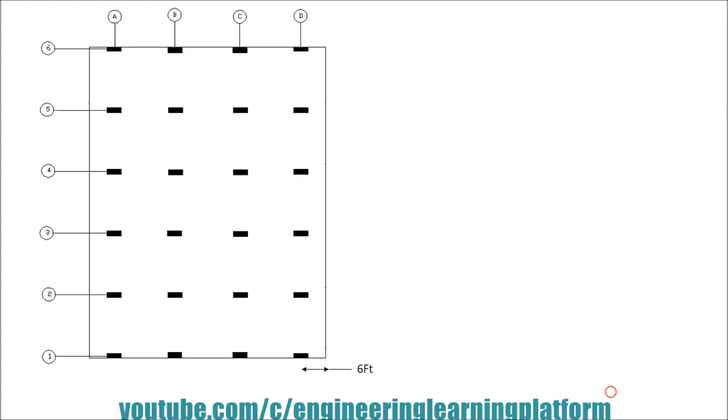In this video, I am going to show you the complete design and detailing of a reinforced concrete flat plate slab using ETABS. And in the video, we will also use Excel for the shear check of the slab.

The given parameters are: FC prime 5 KSI, fy 60, floor height is 10 feet, and we have to design the first floor slab in a 3-story building. Columns are 12 by 36, center to center span is 12 feet. The occupancy of the building is residential. SDL load is 36 PSF, plinth beam is 12 by 24. We have to use UBC 97 and ACI code.

First, open ETABS and go to new model. Define the grids in X and Y direction. Number of stories is 3 and the story height is 10 feet.

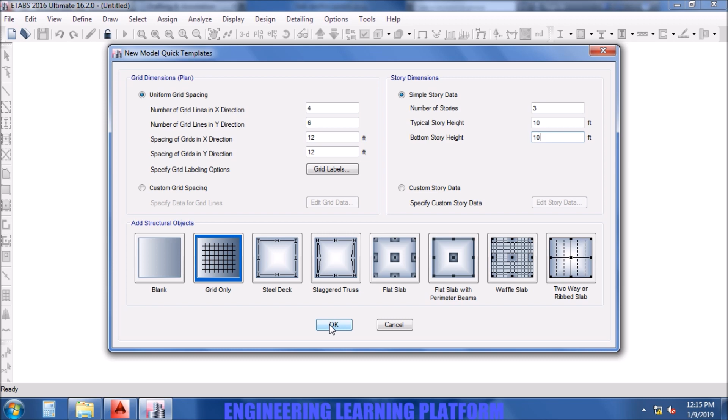Defining material properties of concrete as 5 KSI or 5000 PSI. You need to check the material property data.

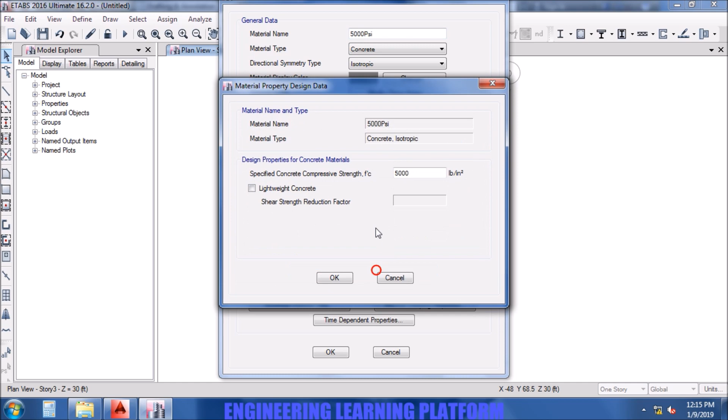Defining the reinforced bar, 60 KSI. Let's rename it as G60 deformed so that we can identify our material easily.

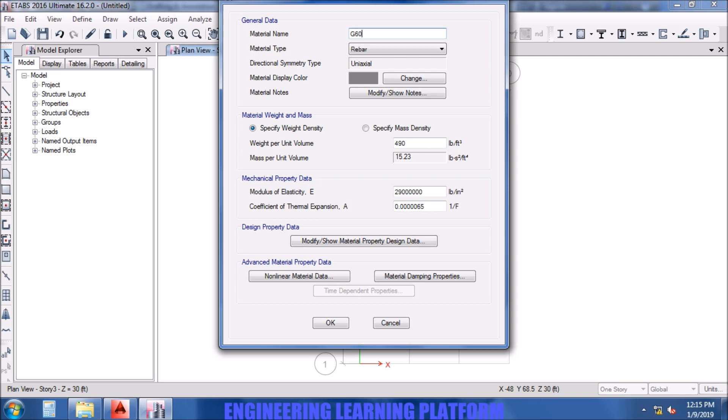Now we will need to define the frame sections. First, defining the column section. The column is 12 by 36 as given.

Material was 5 KSI. The property modifiers, according to ACI code incorporating cracked moment of inertia, is 0.7 of the gross moment of inertia. So we incorporate that using property modifiers.

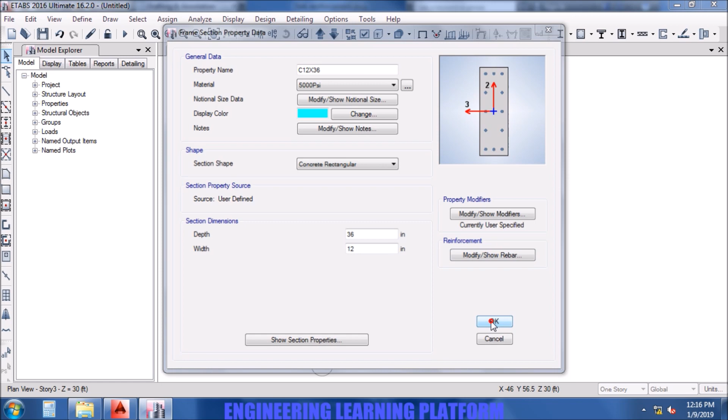Modify show rebar, in which we will select our rebar material. Click on OK. You may delete multiple properties which will not be useful to you, but for now I am leaving them.

Now defining the slab. In order to find the slab thickness, we will use the ACI table. The slab is without drop panels and consists of exterior and interior panels, but conservatively we will use exterior panels so that our slab has a uniform thickness.

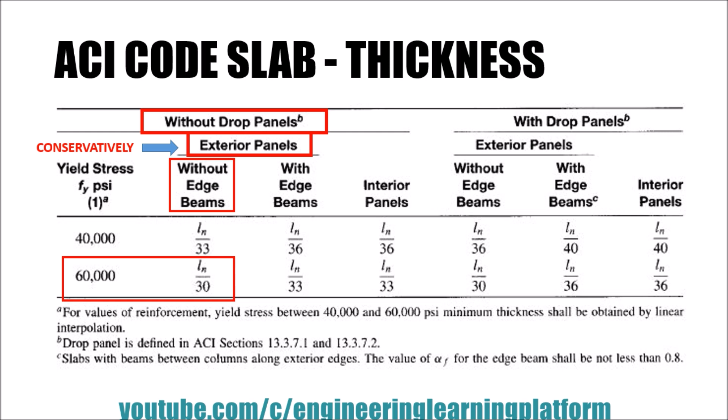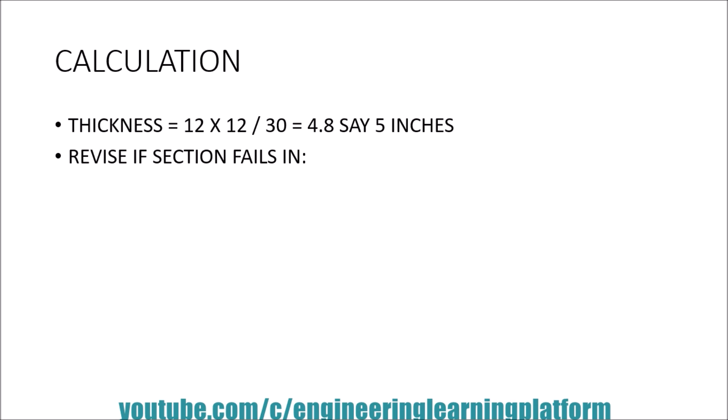An exterior panel will give a higher value of thickness, and it is without edge beams, with steel of 60 KSI. So we divide the clear span by 30 to get our initial iteration of thickness. You may revise the cross section if the slab fails in deflection, flexure, or punching shear, which I will check later in the video.

For now I am defining the slab as 5 inches, which we calculated. Property modifiers.

In order to understand the difference between shell thin and membrane, you have to go to the previous videos for the ETABS tutorial, whose link is given in the description of the video. For now, I am assuming we have gone through the previous videos.

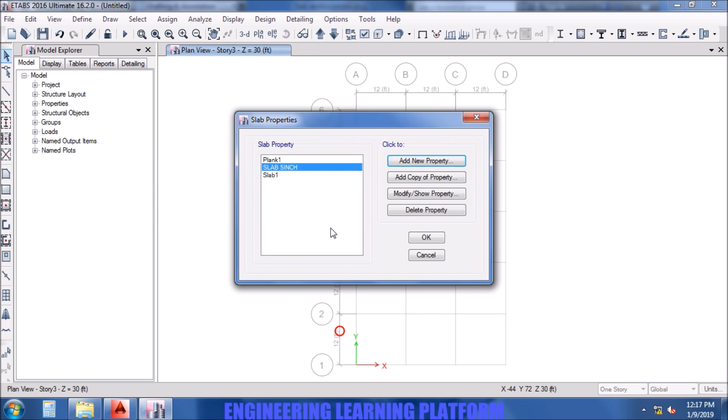So now we will incorporate the crack moment of inertia for the slab using ACI code, which is 0.25. Click OK. You may delete the other properties which are not useful to you, so that there are less chances of mistake.

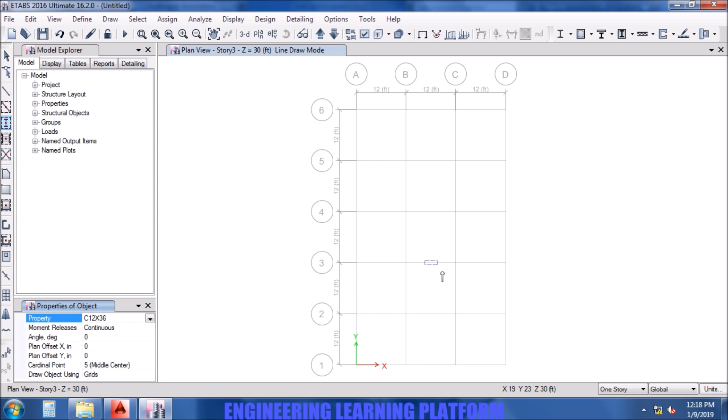Now start modeling the structure. Since the grid lines lie at the centroid of the column, you can always draw the columns the way I drew them.

Now you see we have to select the slab which we defined. Now for the cantilever part of the slab, which is 6 feet given in the question, we will draw a dummy beam with 0 stiffness, which is just for drawing the slab boundaries.

6 feet multiplied by 12 gives you 72 inches. So give the offset dimension of the dummy line. Similarly for the other side.

Now we will draw the slab using the line. Now you may delete the reference lines which you marked.

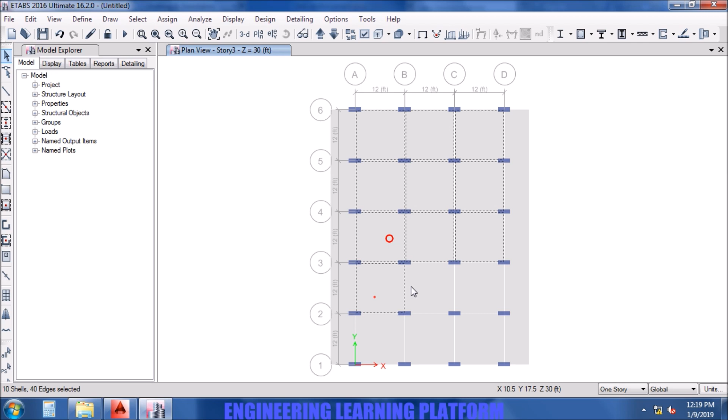Now for slab meshing, in order to know how the slab is meshed, you need to go to the previous videos. For now, I am assuming you have gone through them. According to the slab meshing rules, the slab shall be meshed in a maximum 3 feet by 3 feet area. Since the slab panel is 12 feet by 12 feet, dividing it by 3 feet gives you 4 by 4 areas in the x and y direction.

Since the slab meshing lines shall be continuous, you need to select the joints, and for the cantilever part, mesh it by extending the lines from the joint. So the cantilever part is meshed in the y direction. For the x direction, it is 6 feet, so at least 2 areas of 3 feet by 3 feet are required.

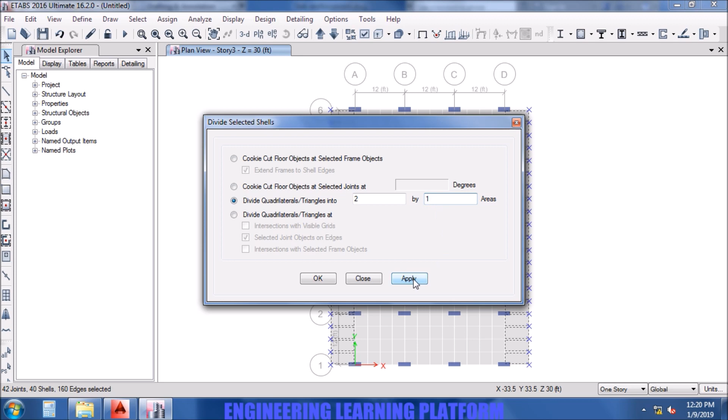No meshing required in the y direction since it was already meshed. So now we have done the meshing of the slab manually. For auto meshing options, you may click on the video whose link is given in the description.

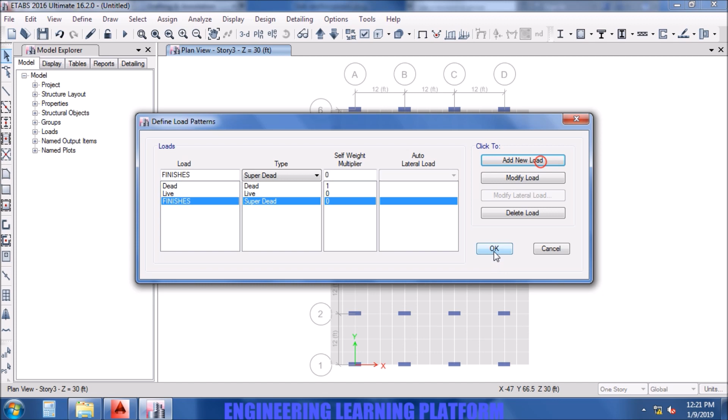Now defining the load patterns. The load patterns for the finishes, which is a super dead load, now we need to assign the loads on the slabs.

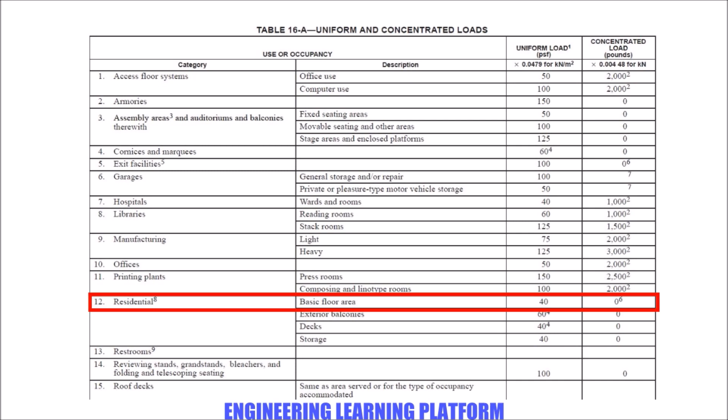First of all, select all the slab panels using the selection option. Go to shell loads and click on live. Now going to UBC 97, which we were advised to use, the live load for residential structure given is 40 PSF. You may click on replace existing loads, so any existing loads will be deleted.

Now click on previous selection and assign the 36 PSF finishes load. So now we are done with assigning the loads to the panels. You have to verify the loads by clicking on a panel and right click.

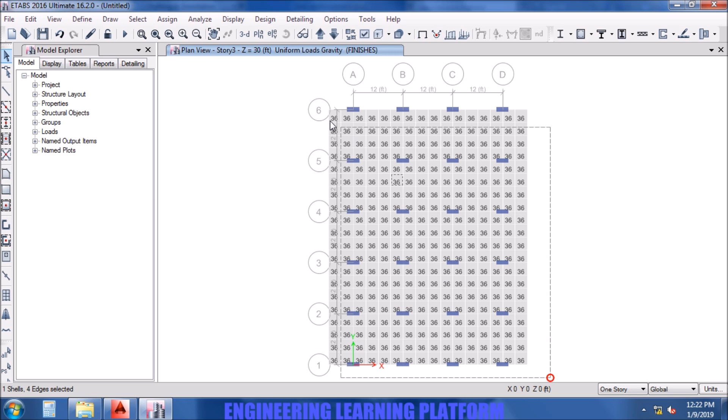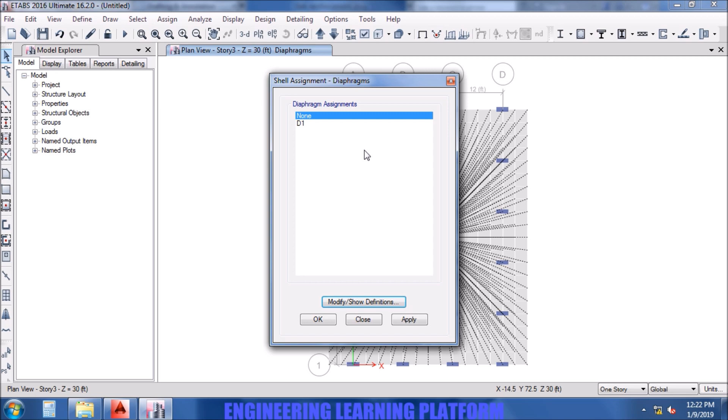Since the loads are now assigned to all of the panels, we may proceed to the next step. We have to assign diaphragm to the slab. The diaphragm is usually assigned in a non-prismatic or irregular structure, but our structure was regular, so it was not necessary to assign the diaphragm. Make sure that for concrete structures the diaphragm selected has a rigid property.

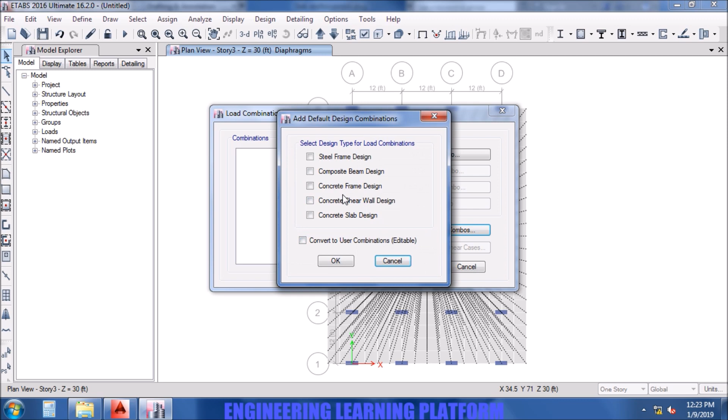Now selecting the design code for the slab so that our combinations will be according to ACI 318-08. Now add default design combinations. Click on concrete slab. Since we are designing the slab, check the combinations according to ACI code.

You have to add a long-term deflection combination so that we may check that the slab is not failing in deflection. Now the multiplier for the sustained loads is 3, and for live loads is 1.5.

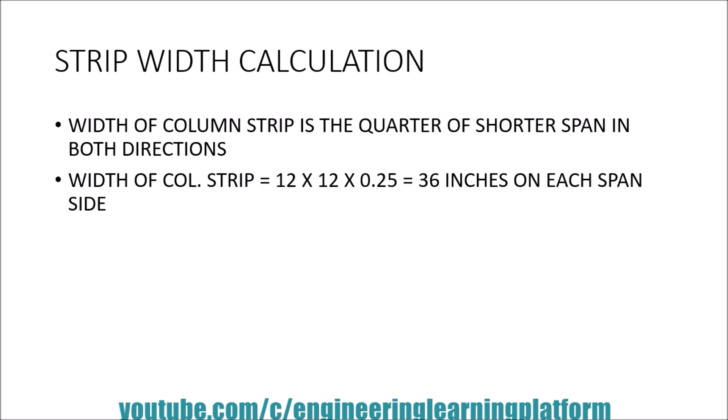Now we have to draw the slab strips for column and middle strip. The width of the column strip is a quarter of the shorter span in both directions, but since our both directions are of 12 feet, the column strip width is 25% of 12 feet. That means 36 inches on each span, while the middle strip will be the remainder area in the slab span.

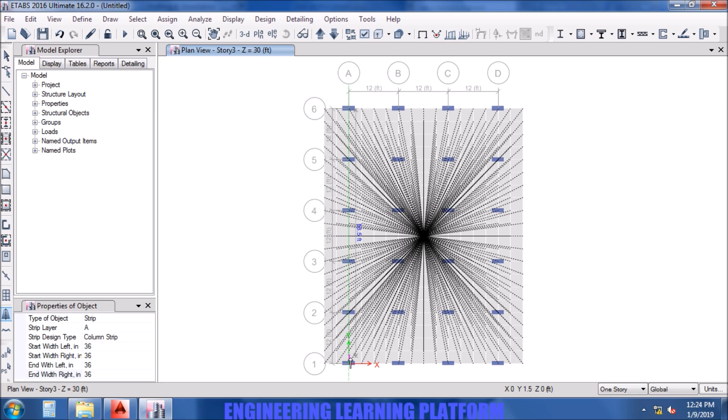Now in order to see the strip width, you may turn on the show width option. Click on apply and OK. Now draw the middle strip.

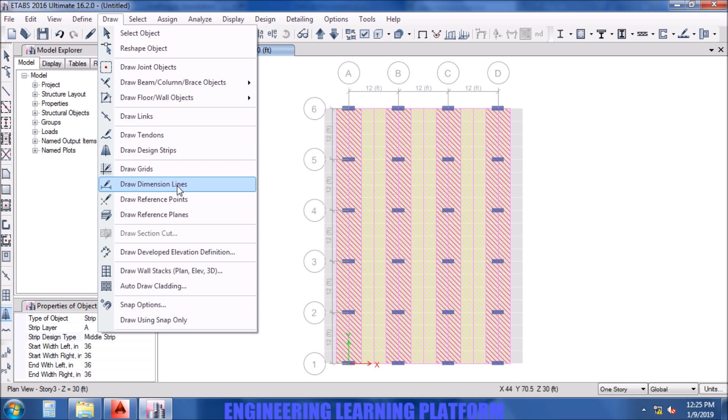Since it's on one side only, you may neglect the left strip width. Now for the left side, you may neglect the right strip width.

Now turn off the strips, and we have to draw the strips in the other direction for the reinforcement to be designed in that direction as well.

Note that the strip width of the column strip remains the same in both directions, since we are considering 25% of the column strip width of the lesser span in both directions. Now drawing the middle strip.

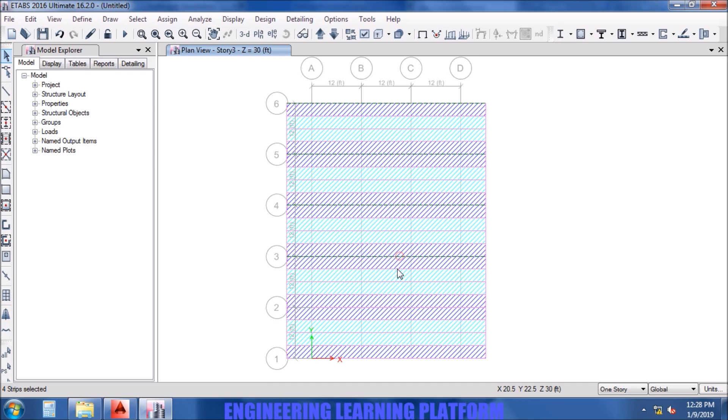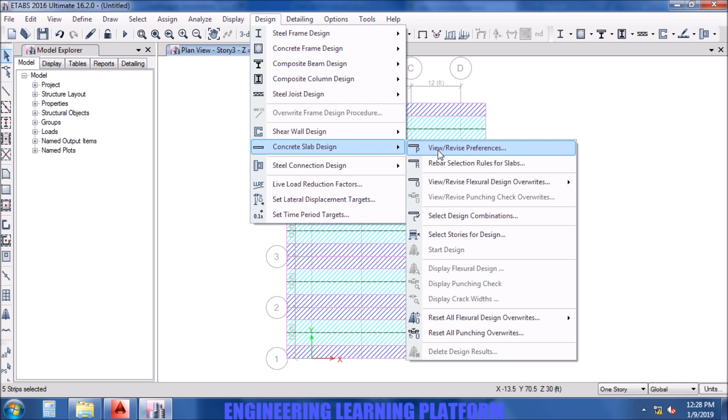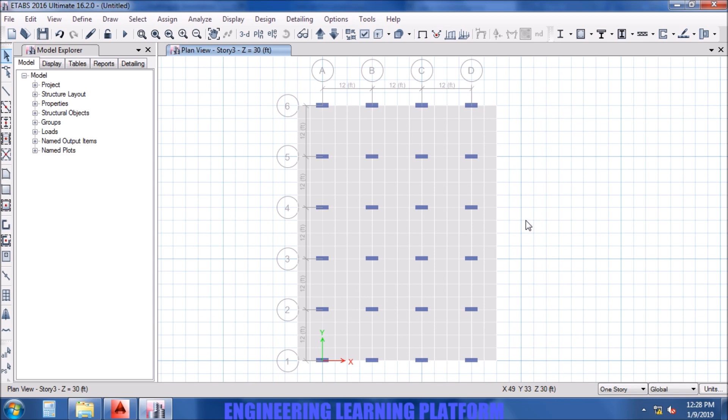Since our ultimate goal is to assign the material for the rebar in the strip, now going for the middle strip. So now we are done with drawing the strips and assigning the proper material for rebar selection, so that area of steel will be calculated according to the strength or Fy of the steel assigned.

Now show the width of design layer A and B. Now select the slab and replicate it to the second story. Since we were drawing in the third story, we replicated into the second story.

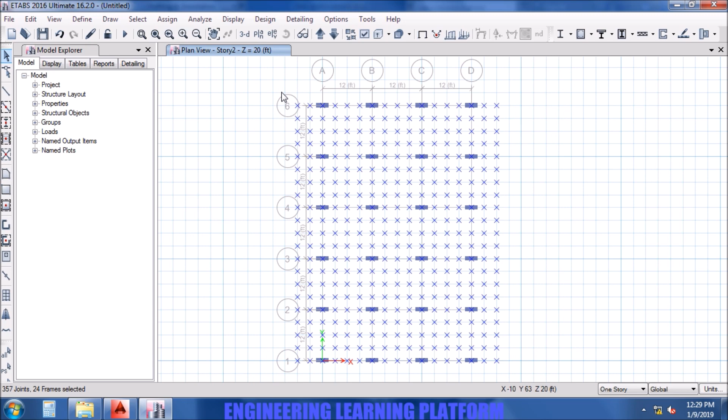Now for the lowermost story there is slab on grade, so we need to replicate the frame only and draw a plinth beam over there. Since the slab will not be a reinforced one, it will be a slab on grade, so we replicate the frame only, and now we will have to draw the plinth beams.

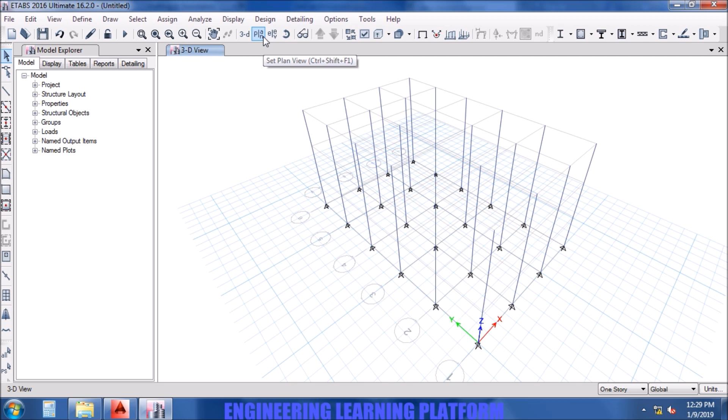You may check the alignment of the columns in 3D, that the columns are continuous and joints are properly formed. Now adding the property of the plinth beam.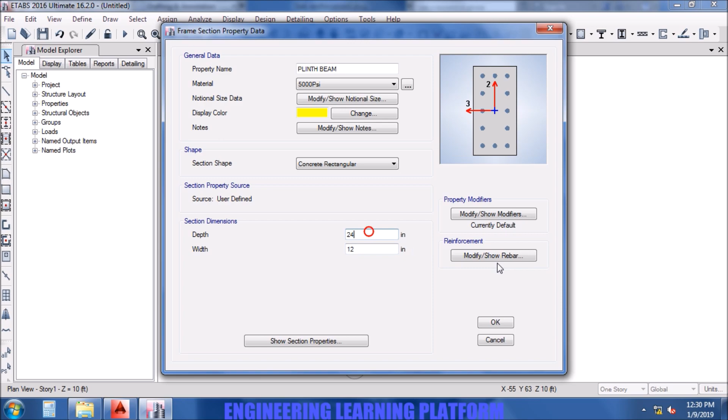The property modifiers according to ACI code, incorporating the cracked moment of inertia. We take the torsional constant as 0.001 so that no torsion is incorporated in the beam. Select beam for reinforcement, click on OK.

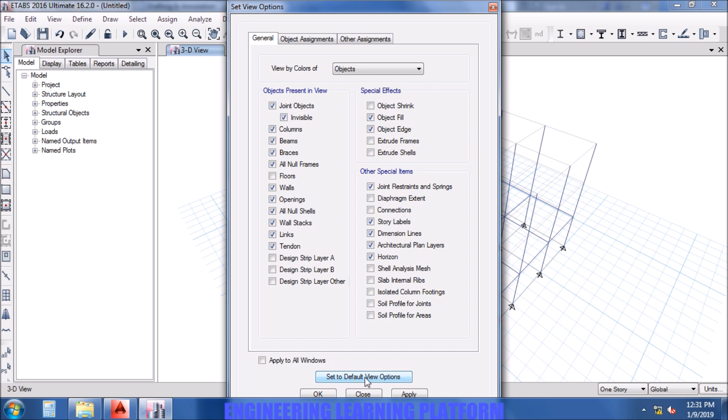Since our beams lie on the grid, I may use a quick modeling technique here. Take the beam and hover over all the grids so that the beam is drawn over the grids. Now turn on all the visibility options.

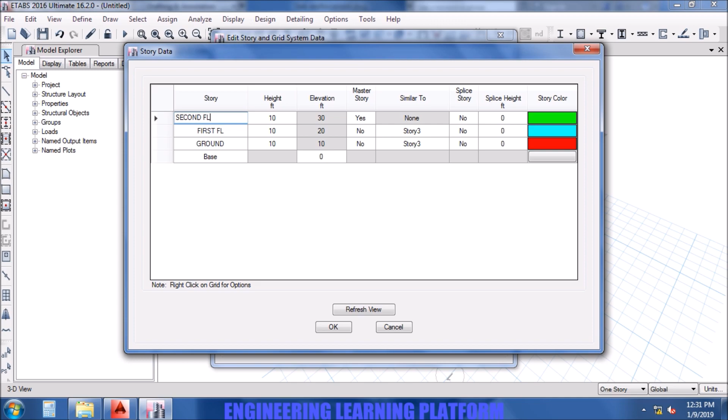Now you may edit the story names for easiness to understand. Let's name story 1 as ground, the first floor, and then the second floor. Our scope is to design the first floor only. Click on OK.

Now run the analysis and then save the structure. Since it's example 2, for example 1, you may click on the video in description.

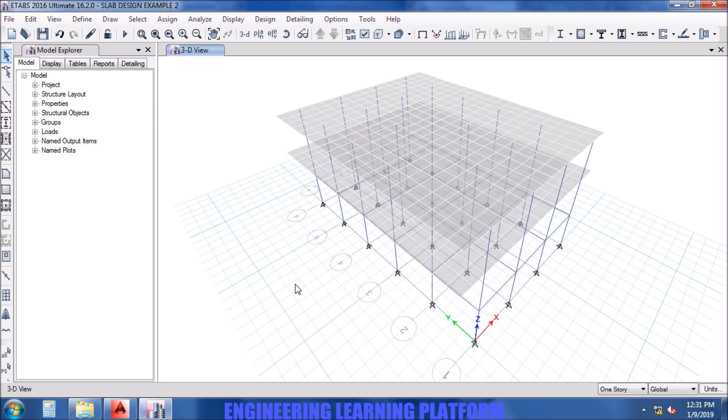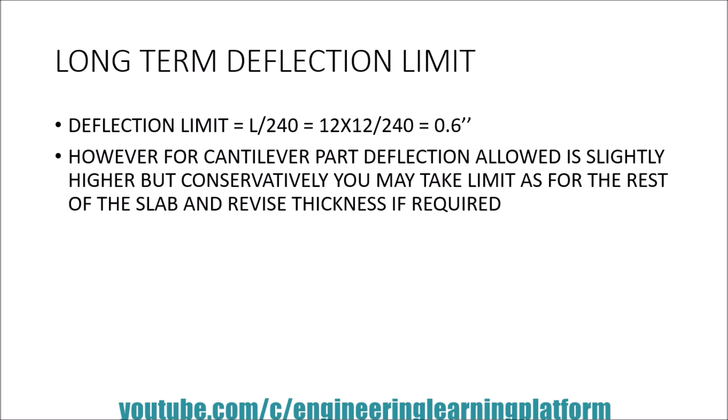The deflection according to ACI code is L by 240. For the cantilever part, deflection is slightly higher, but conservatively you may take the limit for the rest of the slab and revise thickness if required.

Check the deflection at long term. On the bottom left of the screen, you may note the maximum values. However, our concern is only the absolute value, so the deflection is greater than our limit of 0.6.

So now we have many options. Either we revise the strength of the concrete, increase the strength of the steel, or simply increase the slab thickness. You may increase the slab thickness stepwise, in iterations.

First you may increase it to 5.5 inch, then 6 inch, then 7 inch, but just for demonstration purposes I am directly increasing it to 8 inches.

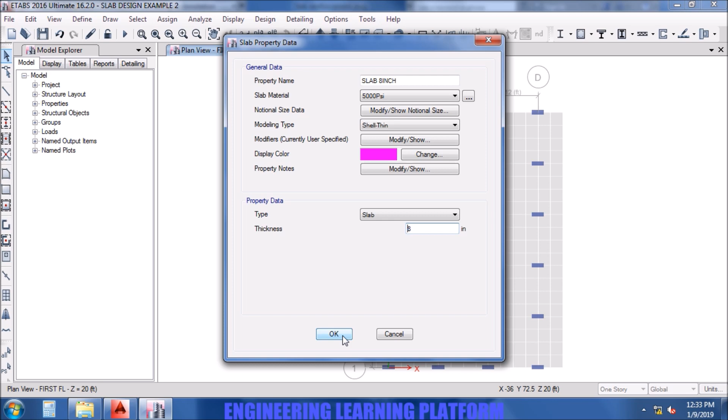Now run the analysis and do the checks again, whether the slab passes or not. Long term deflection, click on apply.

Okay, now the maximum deflection coming out is minus 0.56, that is in the cantilever part. The coordinates are given in bracket, which is under control and within the limits.

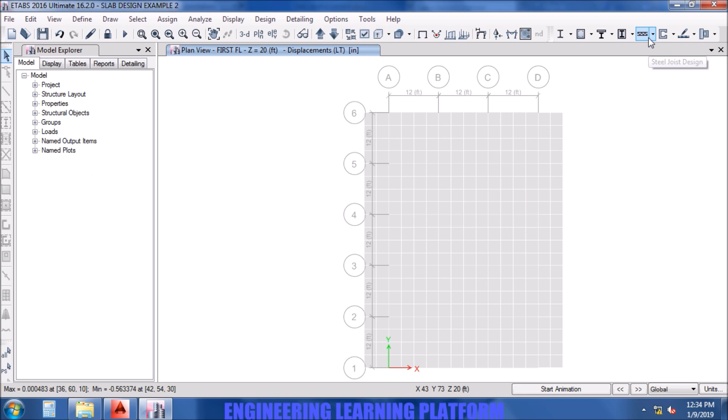Now in the next step, since the slab has passed the deflection check, we may check the punching shear, whether the columns are not punching in the slab.

For that you need to design the slab first. So now the slab is designed. Display the punching shear check.

The punching shear check: the numbers displayed shall be less than 1, which is the ratio of the design load to your capacity of the slab, which shall be less than 1.

Now you may use the Excel sheet for the cross check. Since the Excel sheet I am providing in the description is in MKS system, you may change the ETABS units into MKS system or SI system.

Click on the most critical column. You may need to zoom for that. Right click and you may get the parameters we have to input in the sheet, which will be a cross check, or you can say a manual check for the punching shear.

The thickness of the slab and the effective depth. Cx and Cy are the column dimensions in X and Y. It is important that you input the correct dimension in the correct axis, so that the moment will be input according to that.

So now the shear force is to be put in Pu and the moments in y and x direction according to ETABS. You may have to carefully input the directions, whether it is mu2 or mu3.

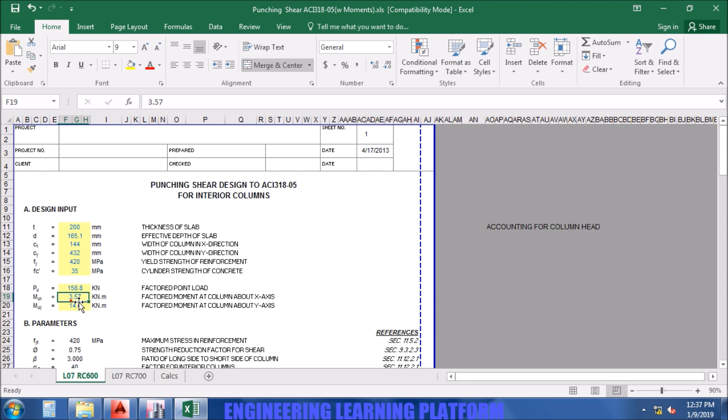For Cx direction the moment is mux, and for Cy direction the moment is muy. You can also view the strip moment diagram for that case if you don't understand which direction which moment shall be assigned. Usually for the wider column side, the moment is higher.

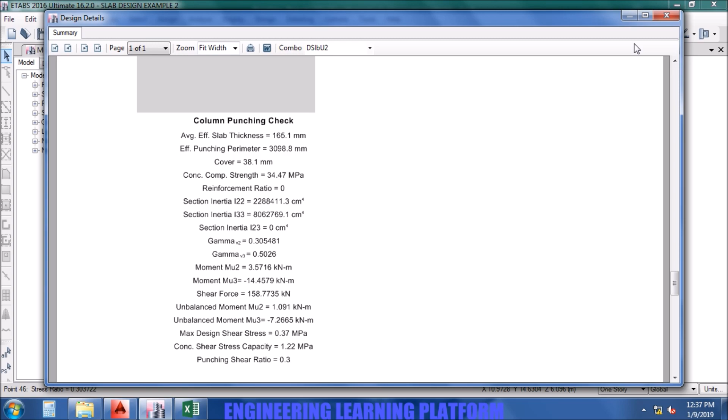Now we are done with giving the parameters to the sheet. So the sheet gives you various parameters. Punching shear reinforcement is not required.

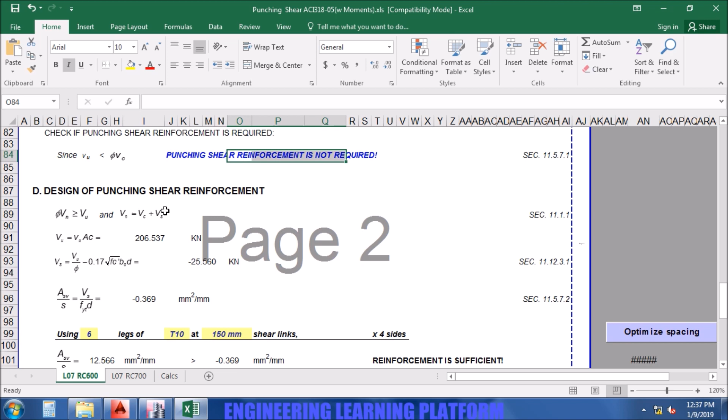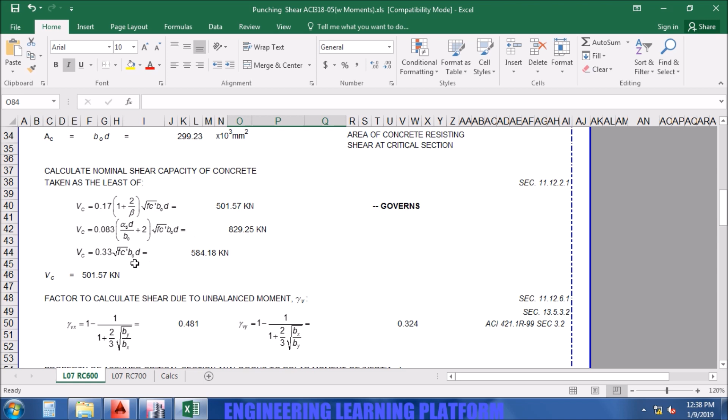If the slab was not adequate in punching shear, you may use iterations here for how to provide the reinforcement for punching, which I will explain in the next video for the design of drop panel and the slabs. For time being, we are okay with the punching shear check, so no punching reinforcement is required.

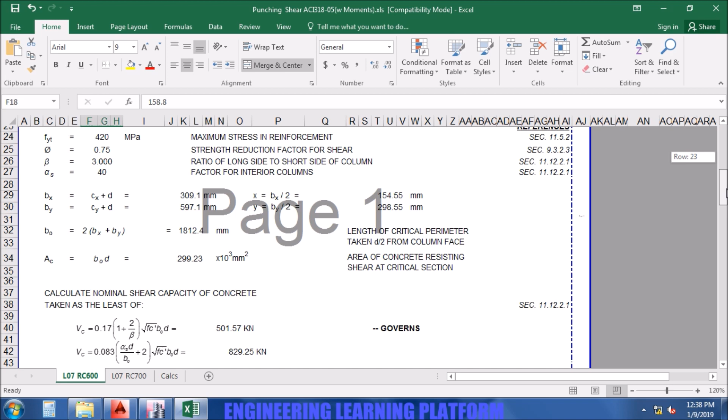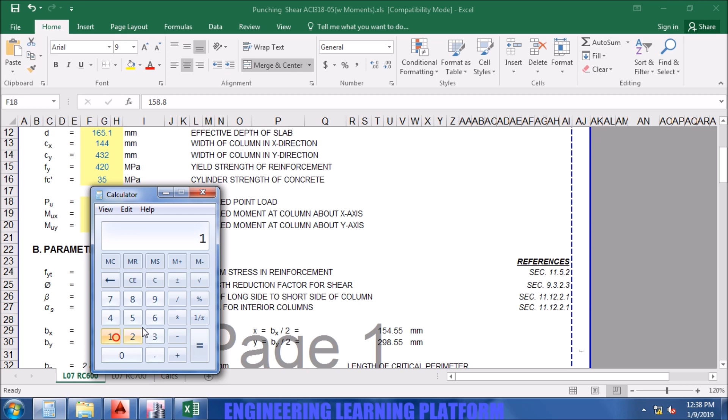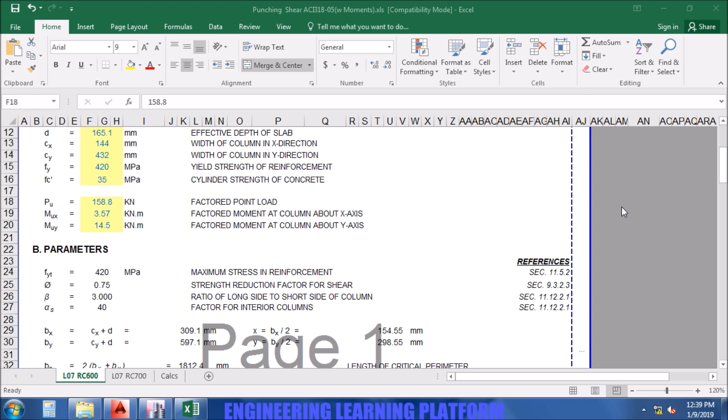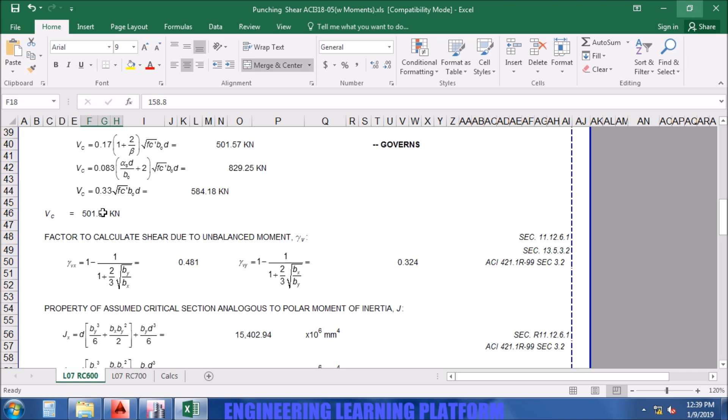The answer would approximately be equal to the one given by the ETABS, which was something like 0.3. You can see other things in this sheet as well. So now we are done with punching shear, so that was not necessary to calculate the ratio.

Now you need to display the flexure design. It is important to click on impose minimum reinforcements so that ETABS give minimum reinforcement where no reinforcement was required.

Now select a top bottom mesh for the slab. Use the units as FPS system. Since there is a bug in this ETABS, you need to click on none and then again click on typical uniform reinforcement so that the option unfreezes for the spacing input.

So now no extra reinforcement is required, that means we have over designed the slab. So decrease the thickness, increase the spacing of the bars. Still no extra reinforcement required, that means we have over designed the slab. We need to reduce the steel in the slab.

Let's make it number 3 bar at 12 inches. So now we are getting a lot of extra reinforcement. Let's make the extra reinforcement as well as for number 3. So now the extra reinforcement is further more increased. That means the slab is complicated and it is difficult to construct it on site.

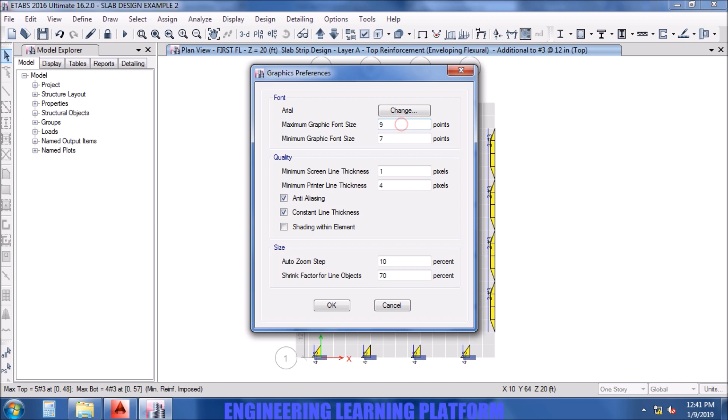Hide the bottom rebar for time being. So the top reinforcement is almost required everywhere where there is negative moment. You may increase the graphic font size for clear visibility. Now you can see the numbers on the screen without zooming or zooming slightly.

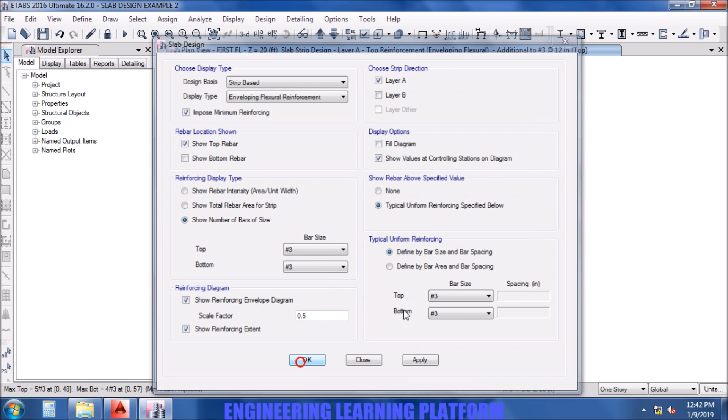Again display the flexure diagram. You may turn off the fill diagram and only see the values. The blue color shows that it is the reinforcing bar.

Show bottom bar of layer A and B. A lot of extra reinforcement is coming. So now we need to revise the mesh.

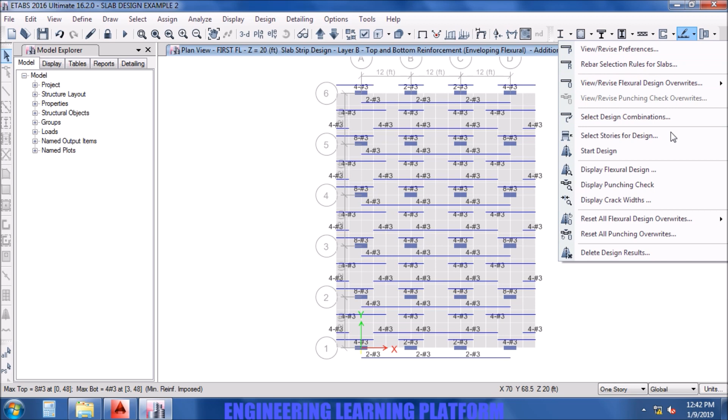Let's just increase the mesh and decrease the spacing to 8 inches. Still a lot of extra reinforcement is coming, so decrease the spacing. Since designing is an iterative process, you have to repeat the procedures again and again. Let's make the spacing to 6 inches.

Very less extra reinforcement is coming, so we need to increase the spacing a bit. You can make it 7.5 inches if you want to, but it would be difficult on site to execute. Let's keep it 8 and 7 inch in other different directions. But again, the mesh is difficult to execute on site, so you may keep the mesh same if you want to.

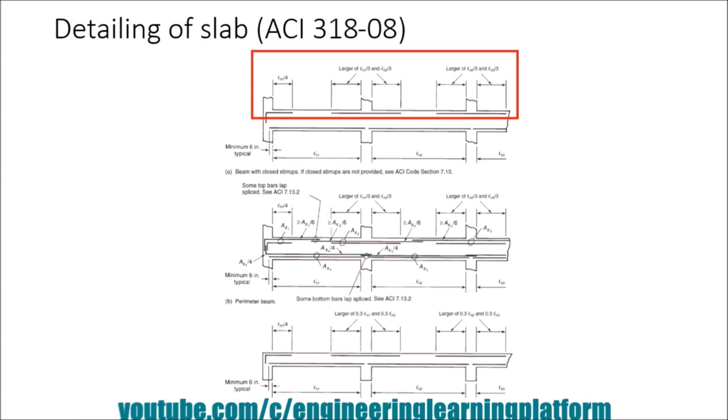Now for detailing purposes, the top negative reinforcing bar shall be extended from the face of the column to at least 1/3 of the span in longer direction. Let's consider two spans. If span A is longer, then in span B, the bar shall be extended 1/3 of span A. In other words, in both spans, the bar shall be extended 1/3 of the longer span.

The blue color shown here is the reinforcing bar, and when you hover mouse over it, the black line shows the extent of the bar, that the bar will be distributed in that direction. It is easier in the latest version of ETABS to understand the distribution of the bar. This option is also incorporated in SAFE, whose tutorials will be uploaded to the channel soon.

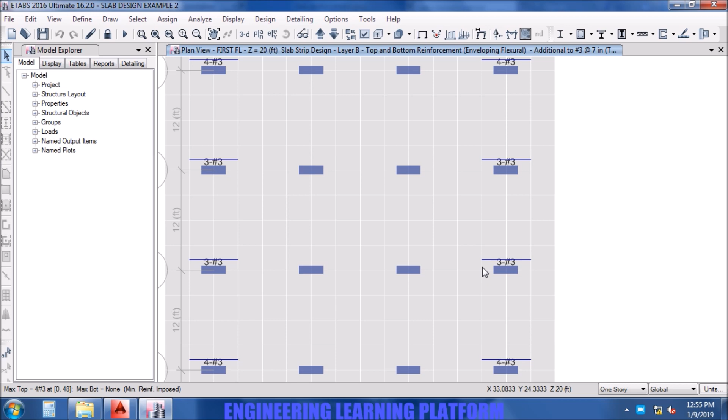So now we will proceed with the detailing. Now you can see the distribution of the bar is 1/3 of the span in both directions of the column, and the length of the bar is also 1/3 of the span in both directions.

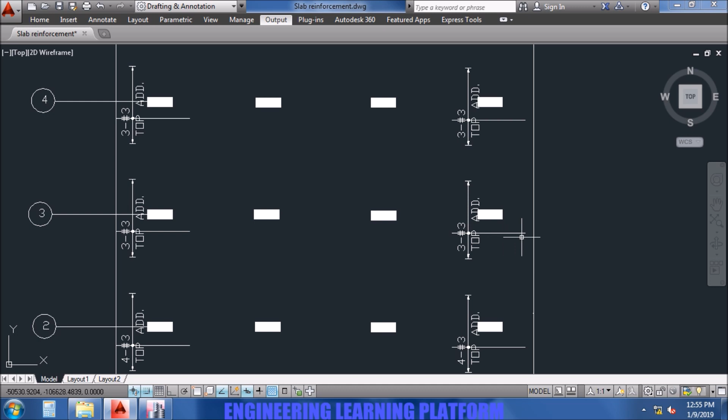Now we will start detailing the slab. Since the reinforcing is for layer A and B, which the draftsman will later combine as a single floor framing plan, for now, for simplicity and demonstration purposes, I have developed two different plans: one for reinforcement layer A and the other for reinforcement layer B.

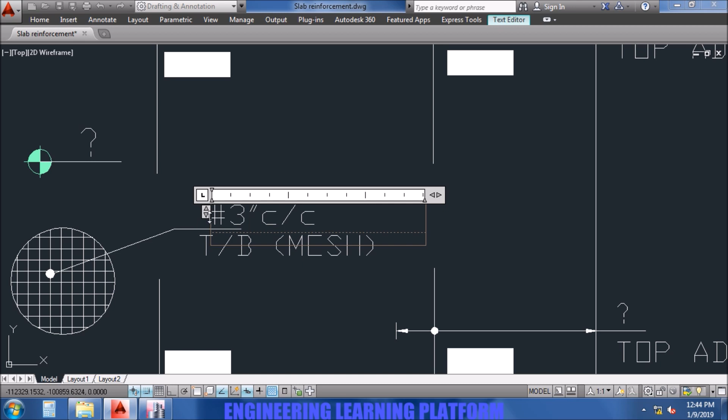Now this is the mesh of your slab, that is dia 3 or number 3 bar at 7 inch center to center in both directions. That is a top bottom mesh and is usually provided in slabs thicker than 5 or 6 inches, and the extra reinforcement will be imposed on that.

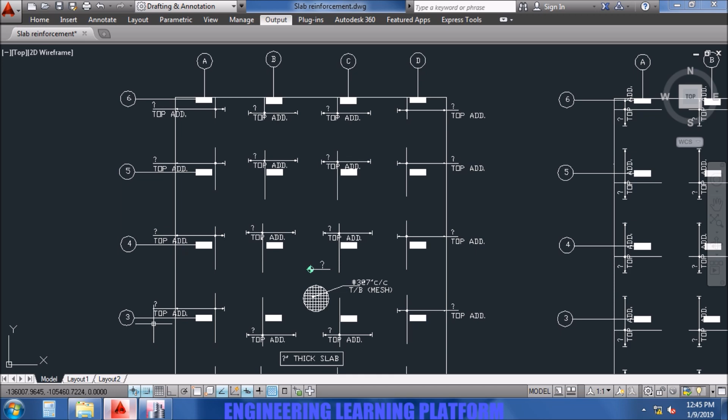So now we have provided the mesh. We need to provide or label the extra bars. Turn off layer B. Nothing in layer A is left, so you may delete the bars drawn here, as ETABS is giving no extra reinforcement.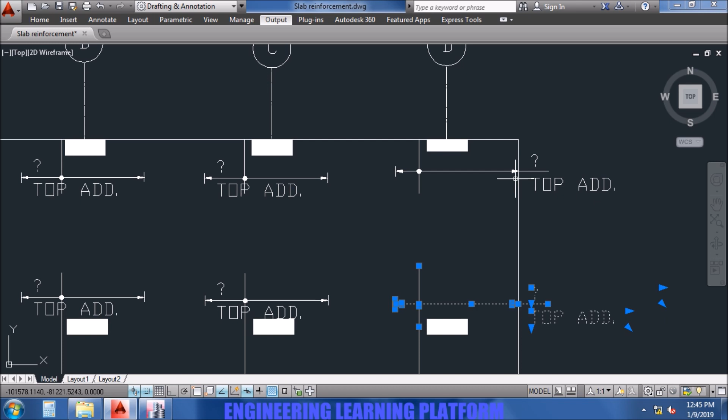The extra reinforcement is coming out in layer B, as the mesh will not be sufficient for layer B, so we may provide the extra reinforcement there.

You have seen in the video that I have done a lot of iterations so that the extra reinforcement does not come too much or does not come nothing at all. There shall be a balance in things always. The extra bars shall not be too high or shall not be too less.

The elevation of the slab is 10 feet from the ground.

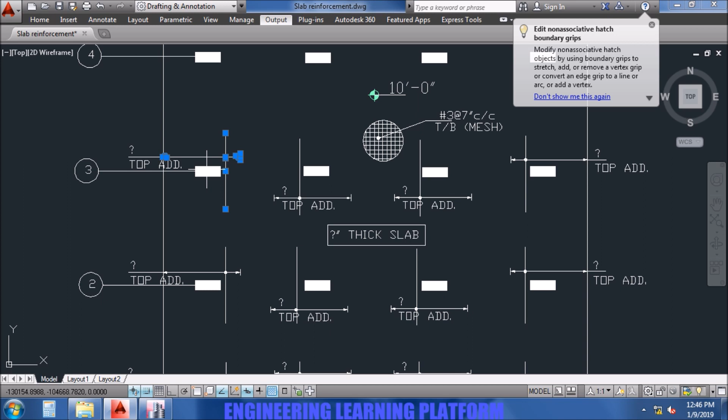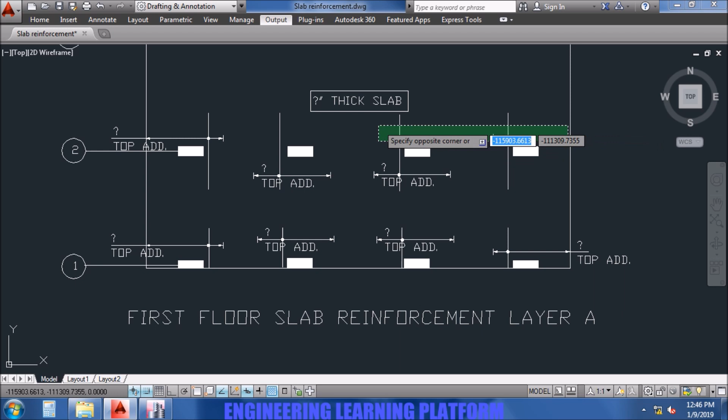Since I continue to delete the extra reinforcement bars since nothing is required in layer A, which was already drawn by my draftsman, I am nearly done with deleting the bars, extra reinforcement bars, which were not required in layer A. The slab is 8 inches thick.

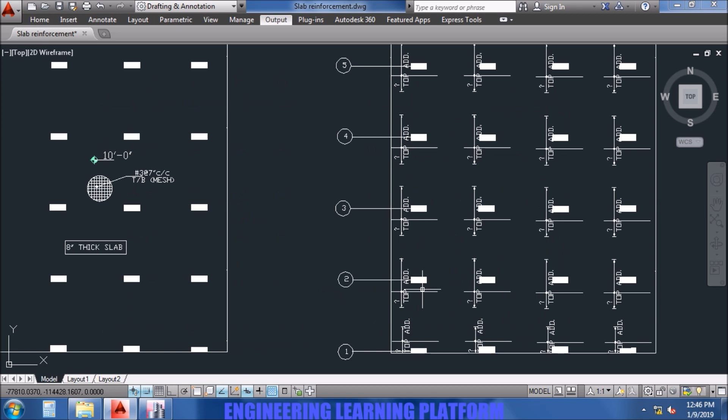Now we proceed to detailing of the reinforcement layer B, where we are sure that we are getting the extra bars. Show top bottom both. Since we are getting no bottom rebar, the extra bars are only the top. 2, 4, 3 number bars are similar since the slab is symmetric. So we proceed to detailing.

2 number 3, extra top. 4 number 3. 3 number 3.

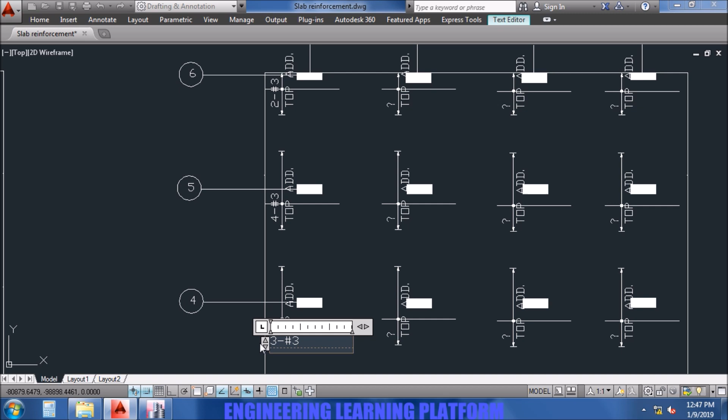You may specify the spacing of the bars, but since the bars are too less in number and the span is larger, the spacing will be slightly higher for the extra bars. So there's no need to mention the spacing. You may also mention the number of bars. It's all depending on you.

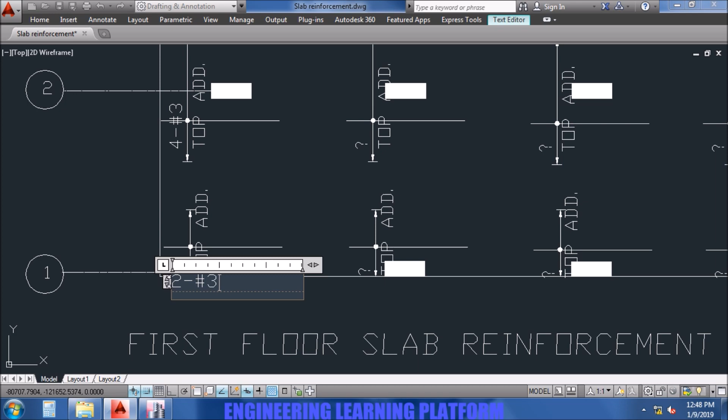While for the main mesh, the spacing must not be greater than 18 inches according to ACI code, since these are only extra bars, the spacing can be greater than 18 inches, or just in terms of number of bars, whether how many bars are required, be it 8, 10, 3 or 2 bars. Sometimes designers neglect the 3 or 2 bars, but it's always okay to provide those bars so the vetting engineer may not get the chance to question whether the reinforcement is provided lesser than required. So it's always the safe side that you provide what is required.

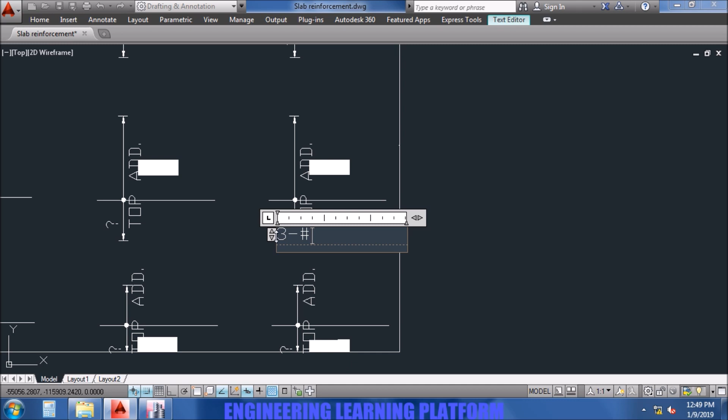3 number 3, actually it was number 3, and 4 number 3. 2 number 3. So now we are done with placing the extra bars in the detailing sheet.

No bottom reinforcement bar was found in the design. Now you may delete the extra bars later on.

The detailing sheet was already drawn by my draftsman.

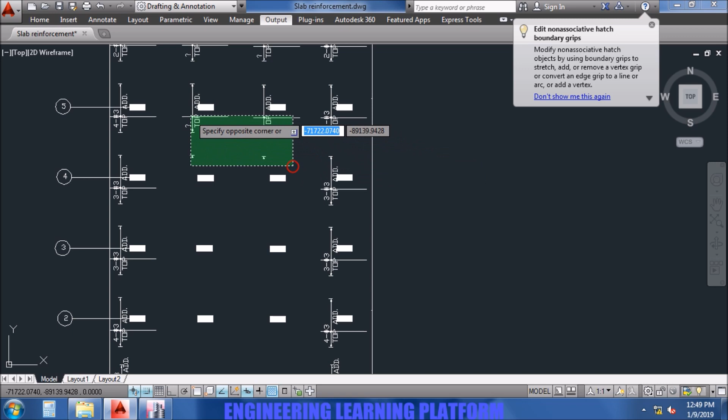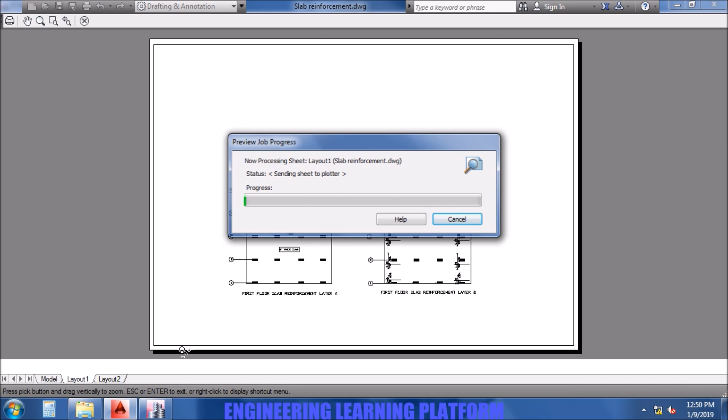Now before printing the sheet, go to layout, press Ctrl P. You will get a layout. Click on preview if you want to preview it. Click on landscape if you want it in landscape. Diagrams are usually in landscape since a lot of extra space is wasted as margins.

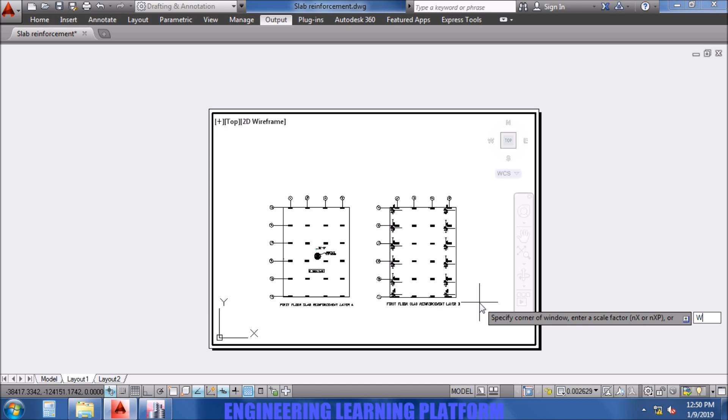So double click on the paper space and click on extents, then click cancel. Click on the zoom command and press W so that it would be zoomed to window, whatever you draw. Adjust and then click on preview. So the sheet is okay.

Now you may convert it into a PDF or simply print it using a printer. For now I am converting it into PDF. So now we are done with printing or converting into PDF.